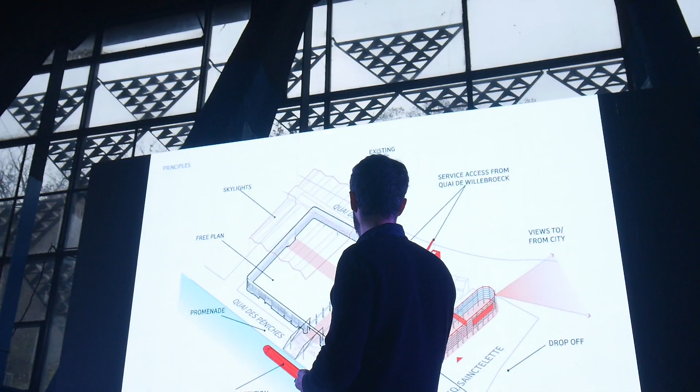In orange, you can see what we added to the existing building, shown in black and white. We added a crane to be able to lift stuff on top of the building, because on the top we have something similar to the Serpentine Pavilion in London — an art meets architecture program with ephemeral artist installations.

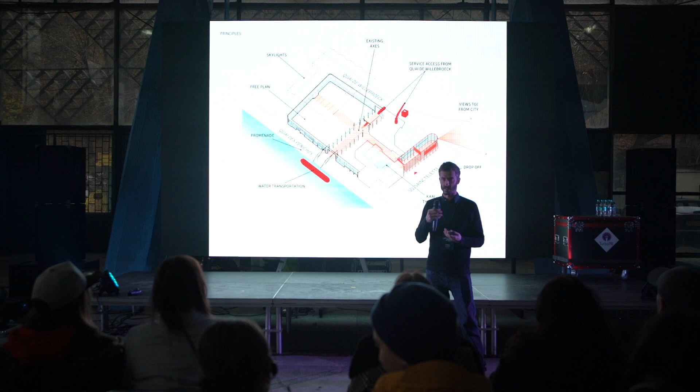As you can see in the first and second floor slabs, we've done some holes to allow for double heights and various programs you could find inside a museum. On the left is the art museum, on the right is the architecture museum, and then you have the library on the very end.

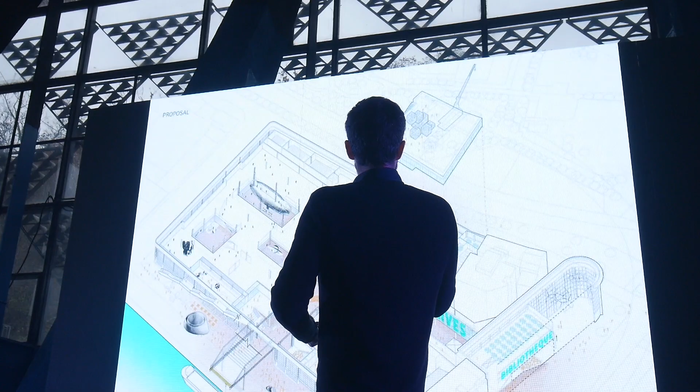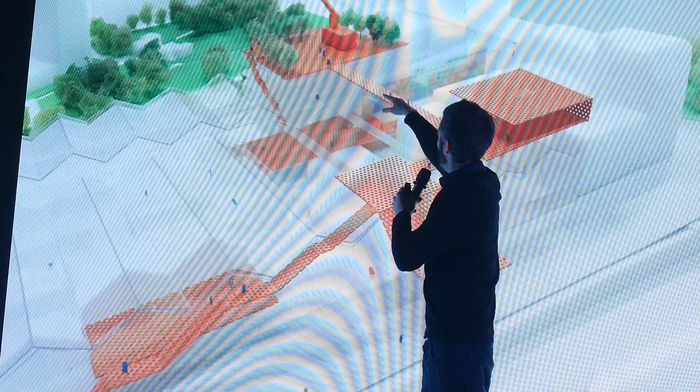Again in orange, we represent what we added to the building. There's a public space which links the garden throughout the building. You access through the garden, then inside the building, upwards to where the crane is located, through this garden, across the building onto this belvedere, and then down again to connect to the existing pier.

Here it is in plan. Another model view — we work a lot with models at JDSA. We believe that's the best unbiased way of actually testing out architecture, and we take a very exhaustive approach. This is the ephemeral artistic program that was to take place on top of the roof.

Here you can see the pedestrian walkway that goes through the building and then upwards and across. Another view with the belvedere that gives onto the pier. And this is an aerial view to give a better understanding of the program.

This leads us to our next project. The idea is to combine architecture with infrastructure, which is something we often do. We have a project in Copenhagen called The Mountain, where the base concept is the same.

Here we talk about the Rimini project, in Italy. This beachfront used to be very popular, a popular destination throughout Europe. The brief from the client, the municipality, was to make it appealing again, since it lost a lot of its appeal in recent years.

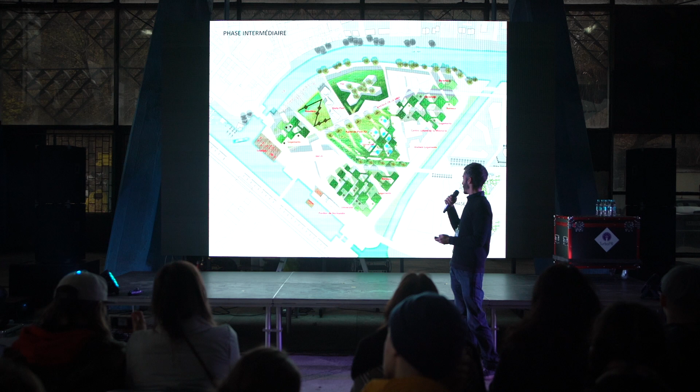Unfortunately we didn't win this one, so it just stayed at the competition stage, but you can see how it works. It was mostly, I would say, cultural, university, office, dwelling - mixed program again - but yeah, unfortunately, we didn't win this one.

A few visuals from the neighboring hill showing how this landscape/architecture would look like from afar. A few more visuals, aerial view also to show the global project.

And then the next project, which is to dare urban generosity - again kind of a leitmotif in the office - this is the Iceberg project. This is also very emblematic of our work at JDSA, one of our most famous projects, I would say.

The initial 3D shape of the building from the urbanists was a pretty boring courtyard typology, which we thought didn't make much sense, since only a quarter of the building would actually face the waterfront, and it would also deprive the neighboring buildings of this relation to the water.

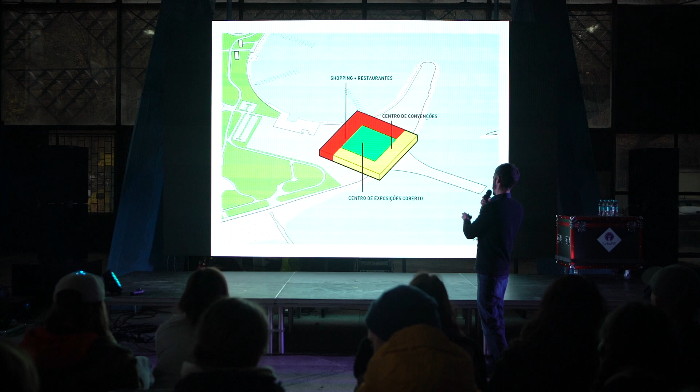From this shape, we fit the program. This is a diagram of the program: shopping, restaurants, convention center, and exposition center. Then we just make it fit on the design land, as you can see here.

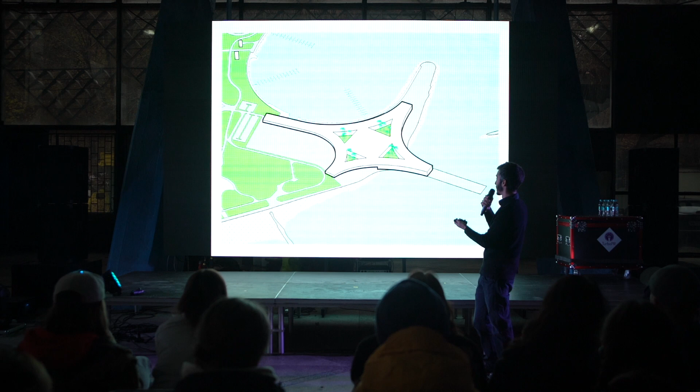Again, sloping down to connect to the public realm and to the neighboring gardens, and going up where we think the view would be interesting, as you can see on the diagrams here.

That would be the final stages of the competition with the model. That was just before the Olympics in Rio, and we didn't win this one either, unfortunately, but we thought it was relevant for this presentation.

A few more visuals. Now for the final project, we reverse the question and ask whether landscape can be architecture, or rather can create or inspire architecture. This project is almost literally a transcription of the meandering of a river as architecture.

As I said earlier, we work on various scales of projects, whether it be master planning, urban work, or architecture, down to furniture design. We work on a lot of different scales with the same level of implication for each, but we believe they're all part of one big thing.

You can see how the house acts like a river inside the topography, and basically the river becomes a house. There are a few plan extracts to show how it works. There's also a reflection on how the architecture mimics nature, creating canyons.